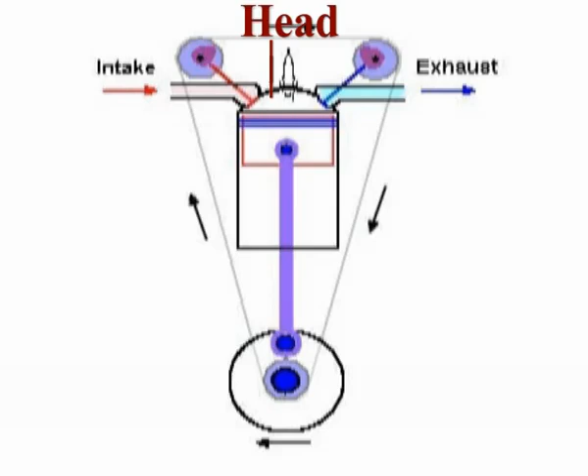Now here is an image which I will go through and explain what we are used to: the spark plug, the head which the spark plug screws into. The ports also go into the head with the intake and the exhaust ports. Then there is the cylinder, which is where the piston that we know of goes up and down.

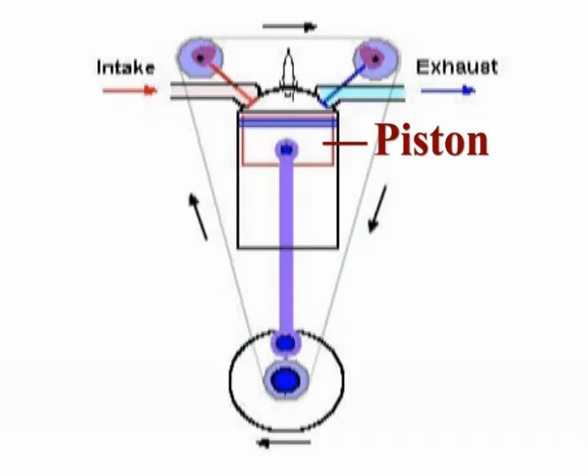It is connected by the conrod to the crankshaft, which goes round and round. And then the intake valve opens up air to go into the intake port, and the outlet port has its own valve as well, which lets the exhaust out.

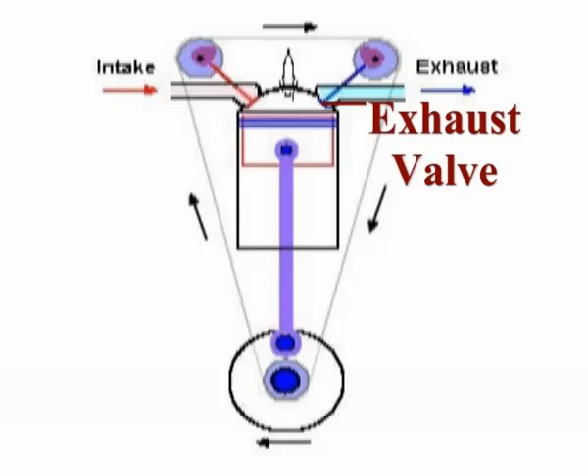These valves are opened by their own cams, the intake cam and the exhaust cam, and these are on shafts which have cogs around them, the camshaft cogs. This chain goes around these cogs and it goes down to another cog on the crankshaft.

When it is running, there are 4 cycles, each on each stroke, the 4 strokes. On the first cycle is the intake cycle. The intake valve opens via the intake cam.

It lets this air-fuel mixture into the cylinder. The piston sucks down and sucks in more air-fuel mixture. The valve then closes, and that is the end of the intake cycle. The piston continues on down to bottom dead center.

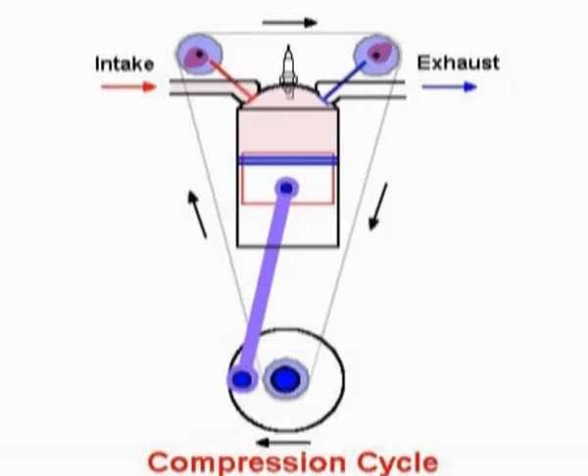It then moves back up, and this is what is called the compression stroke. The cylinder is completely sealed, and the piston pushes up this air-fuel mixture, a gas which is compressed and fired just prior to top dead center.

It ignites, and then it expands, not so much as to be an explosion, because there is not that much in there, and pushes down the power stroke on the firing cycle and pushes the piston towards bottom dead center.

And then the last cycle, it pushes the exhaust burnt gas upwards, compresses it, then opens up the exhaust valve, and the gas comes out, the exhaust gas, carbon monoxide. And that is the standard 4-stroke internal combustion engine.

And now I will just hand you over to Scotty, and he will tell you of the modifications he has done to convert the 4-stroke into a 2-stroke, which runs on HHO brown gas.

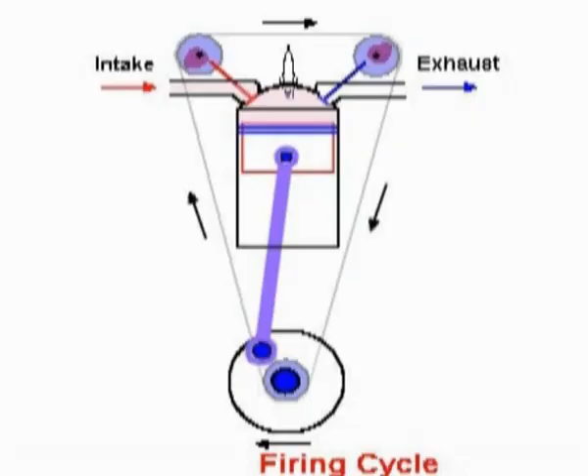Thank you, Ziggy. First things first, as Ziggy mentioned, when petrol ignites, it expands and gives us the power stroke in the 4-stroke engine. HHO, which is hydrogen, hydrogen, oxygen, the ratio of water converted into hydrogen and oxygen by electrolysis, is called Brown's gas.

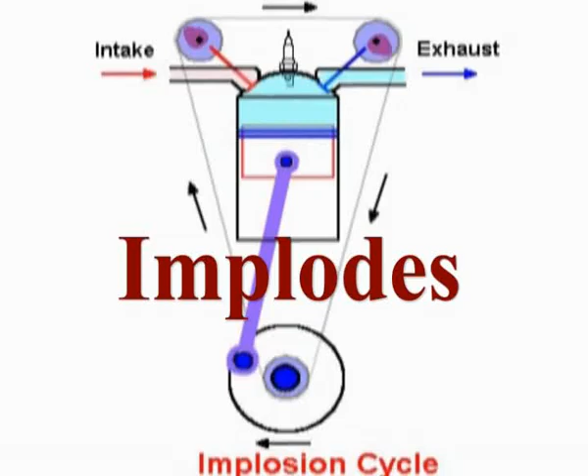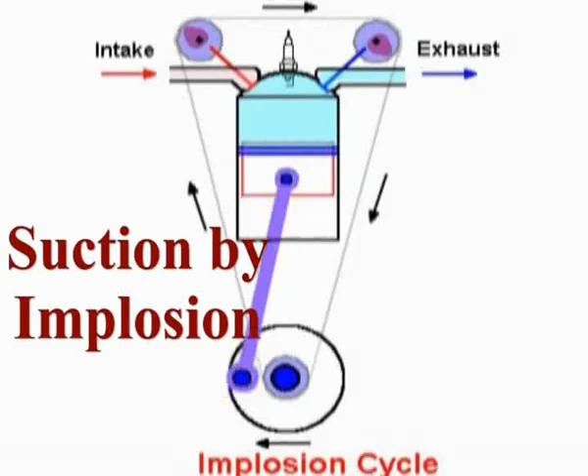When HHO is ignited in a vacuum, it doesn't expand. It contracts, it implodes, which means the HHO converts back to water when it's ignited. And so the piston needs to be sucked to where it is going. That is the motivating force, is suction, a vacuum.

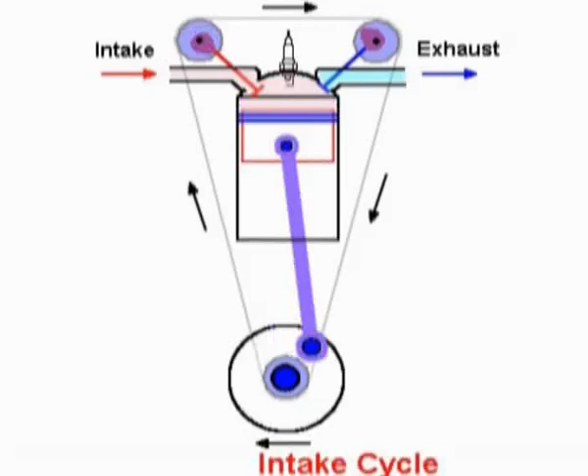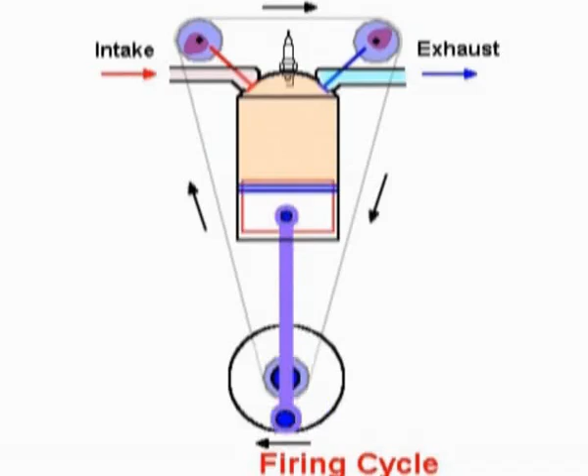With this in mind, this is how we redesign the 4-stroke engine. So we have an intake of Brown's gas. That gas then is drawn out into a greater vacuum, and it is ignited in that vacuum and creates an implosion, which sucks the piston back towards top dead center.

Now, as it's coming closer to top dead center, and this is something to bear in mind, there is an 1800 to 1 ratio, which means the HHO converts back to water when it's ignited, and if there's 1800 parts of it, it goes back to 1 part.

So instead of having all of these expansive gases, as we do as the side effect result of burnt petrol, if there's 1800 parts of Brown's gas atomized, it becomes 1 drop of water.

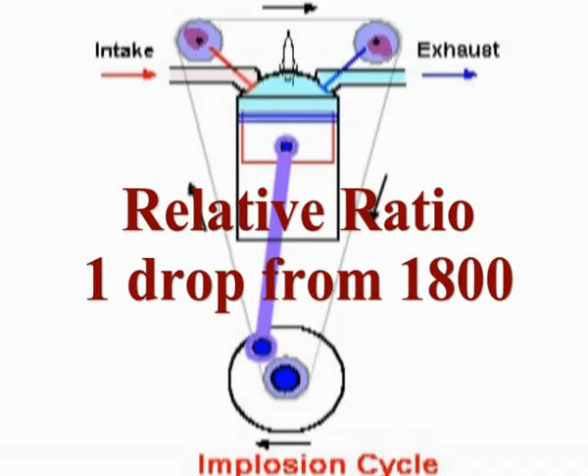So as the piston's sucking up and we open up the valve just prior to top dead center, we're pushing out this one drop of water which is atomized as a spray.

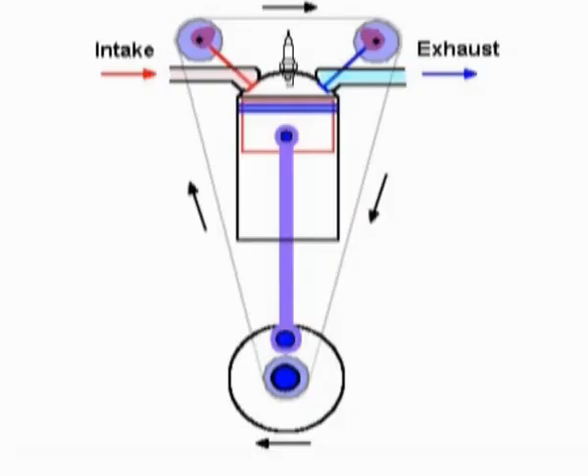And so what we also need at the end of the exhaust is a vacuum there to help facilitate the exit of the water. Because we're doing it in 2 strokes instead of 4, we have to double up and sometimes triple up on what we're doing, what phase of the cycles we are doing on each stroke. So we're putting in an amount which is at balance with what our requirements are, and this is best done with fuel injection.

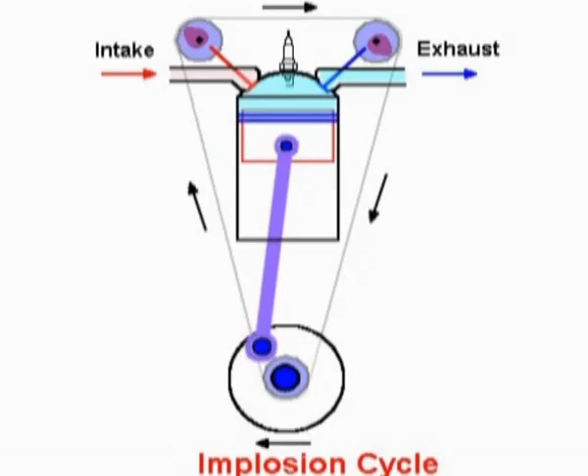The calculations done with a 15 miles per gallon petrol engine running at 60 miles an hour means that it is burning approximately 0.25 of a litre of petrol.

HHO, with injection into a standard carburetion system or fuel injection, which goes into the air intake, mixes with the fuel air of petrol, and the result is that it burns the petrol quicker. But it's different to being straight on its own.

Now the fact here is that they're trying to produce between 1 and 3 litres of Brown's gas, HHO, in order to facilitate this.

Now if we're only requiring 0.25 of regular gasoline, petrol, to run at 15 miles per gallon at 60 miles an hour, then how much Brown's gas do we need in order to run the engine solely on Brown's gas as an implosion engine rather than an internal combustion engine? Even if it was double, half a litre, we can do this a lot more power efficient.

Ideally, we want to be passing this in through fuel injection, as a carburetor is a completely different ballgame. We do not want oxygen, we already have it with the gas. Fuel injection itself mixes air with oxygen - we do not want it. We just want to spray this in.

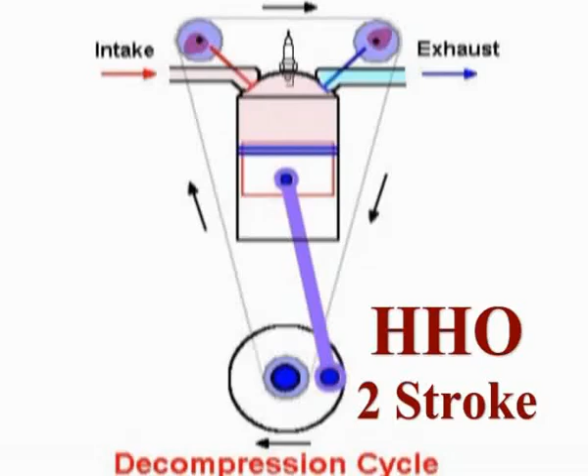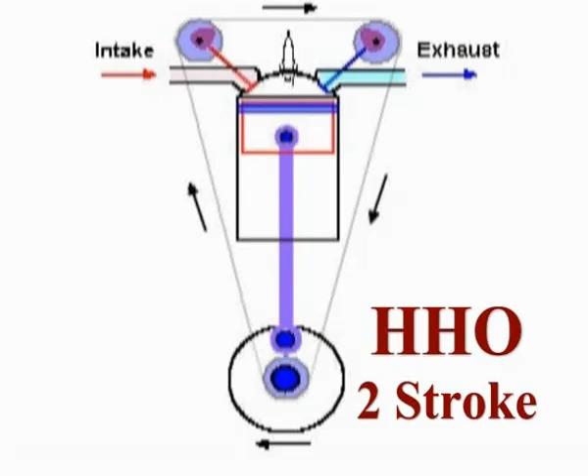So what we have is the intake valve opens up, sucks in the Brown's gas. It goes down, partway down in the cycle, and it is ignited down there before bottom dead center, and the result is that it starts to contract. Now, as always, there's a delay because of the speed RPM of the engine, so that's why it's always before the dead center. And now the piston is sucked back up, and just prior to top dead center, the exhaust valve is opened, and the exhaust condensed water vapor, steam, is passed out. And that is how you do it.

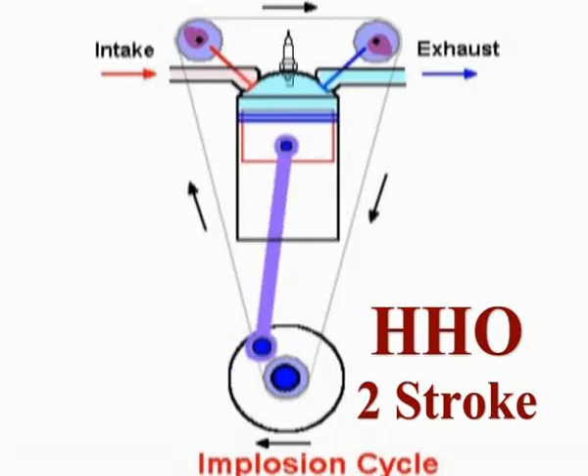Now this is a double overhead cam engine. Using a motorcycle, a 4-cylinder motorcycle, they have a coil on each of the 2 cylinders. So what happens is a coil will fire both spark plugs at once, and both cylinders are in a different phase - one is on the exhaust stroke and one is on the firing stroke.

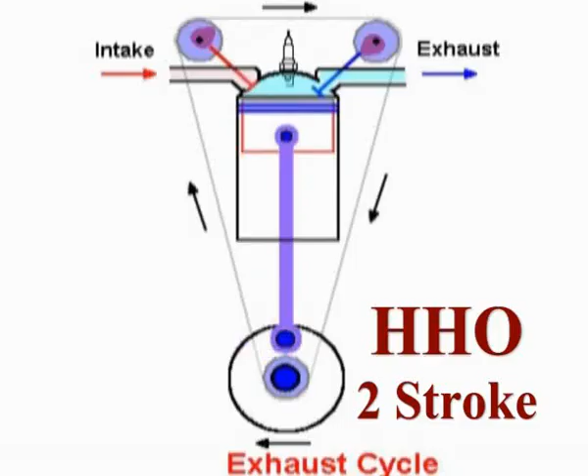Now that's great news for us who are doing this modification, because all we have to do is modify the spark plug timing to be before bottom dead center instead of top dead center, and change the ratios of the cogs on the cams so that they're in 1-to-1 ratio. Also what you have to do is redesign the fuel intake so it takes it as a fuel injection system without oxygen. And of course the ratios of how long the valve is open will allow this to do this properly.